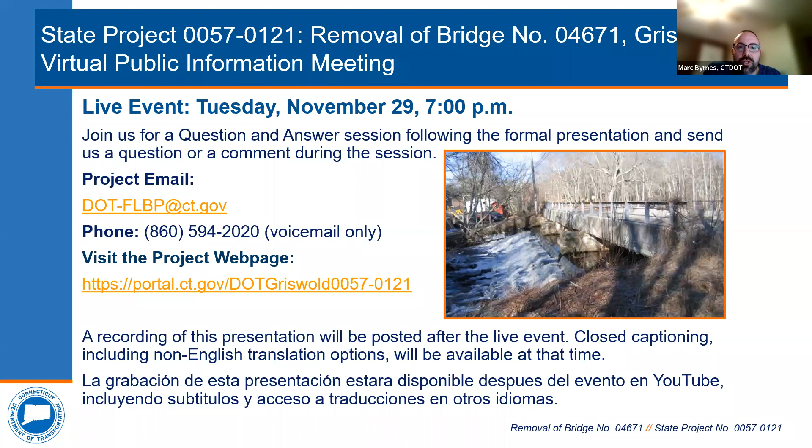The goals for tonight's meeting will be interacting with the project team, explaining the federal local bridge program, design managed by state or DMS program, welcoming remarks by the town of Griswold selectwoman, introductions of the project team, a formal presentation of the design process, which includes explaining the condition of the existing bridge and defining the purpose and need of the project, and recommendation of a viable proposal. Currently, we're only at 30% design plans.

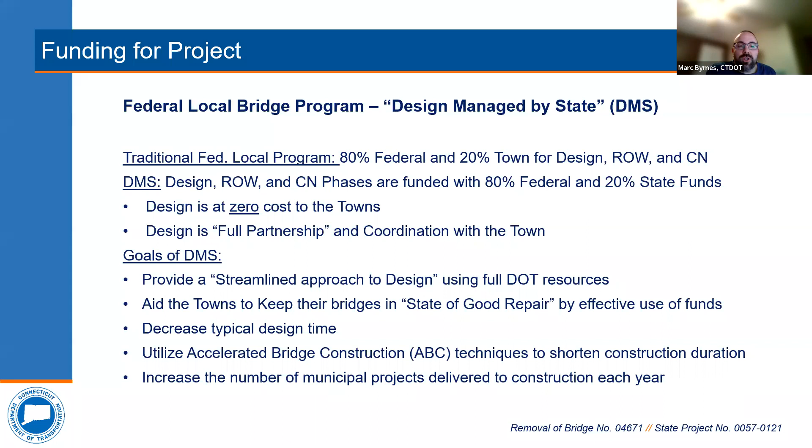Thank you. Good evening, everyone. I am Dana Bennett, the first selectman of Griswold. I'm here along with Todd Babbitt, Griswold's Director of Public Works. Welcome and thank you for joining us. We are pleased to partner with Connecticut DOT in this infrastructure funding for a bridge that was assessed for removal a couple of years ago. And we'd like to thank Connecticut DOT and all of the members that are here tonight to provide this public information meeting. Thank you very much.

Thank you, Dana. I will now introduce the project team. Our division chief is Bart Sweeney. Our principal engineer is Derek Lassard. As I stated, I'm the project manager, Marc Byrnes. Also with me is James Barrows, the DOT project engineer. From the Office of Rights of Way is Zachary Garano. And then from Close Jensen and Miller, who acts as an extension of the department as our liaison, is Mike Brady, the project manager, and Jeff Fontaine, the project engineer.

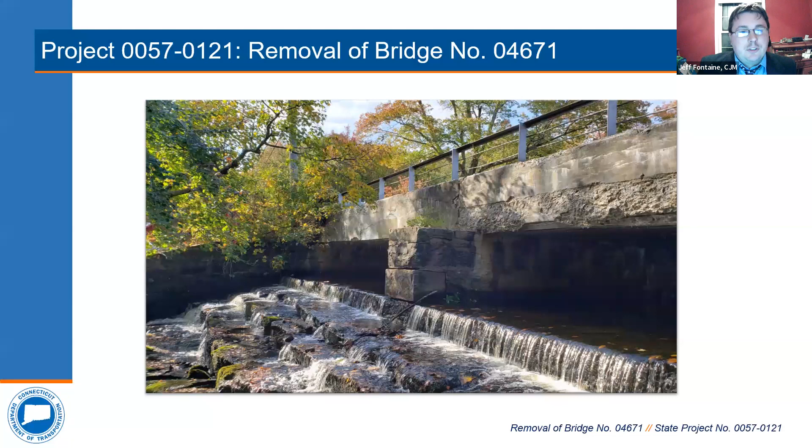With that, I will give it to Jeff. Jeff, you may proceed. All right, thank you, Marc. As Marc stated, I'm Jeff Fontaine. I work with Close Jensen and Miller, which kind of acts as an extension to the DOT as liaison for the state. And as he also mentioned, we're here to talk about the removal of Bridge 4671, which is Carroll Road over the Pachaug River in Griswold.

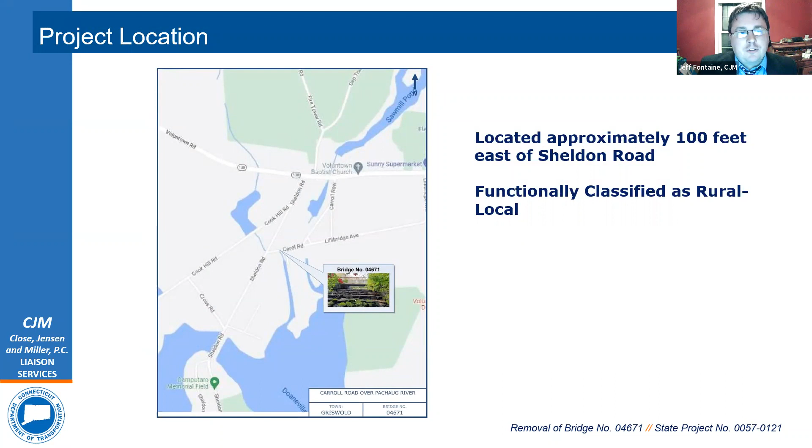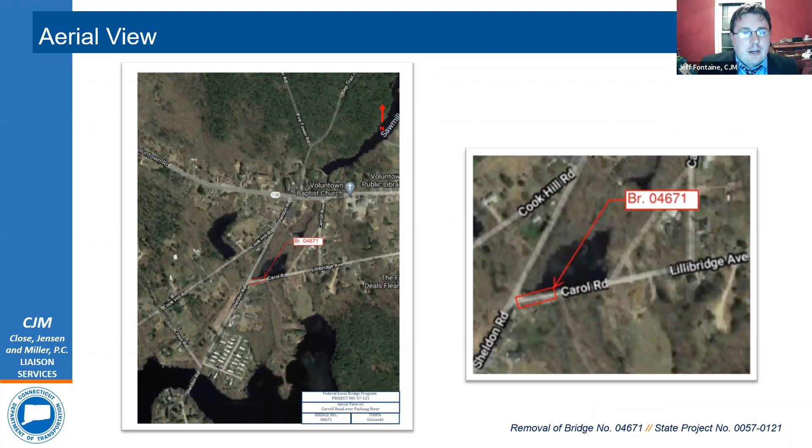And this is just another view from above, just to give another image of what it looks like.

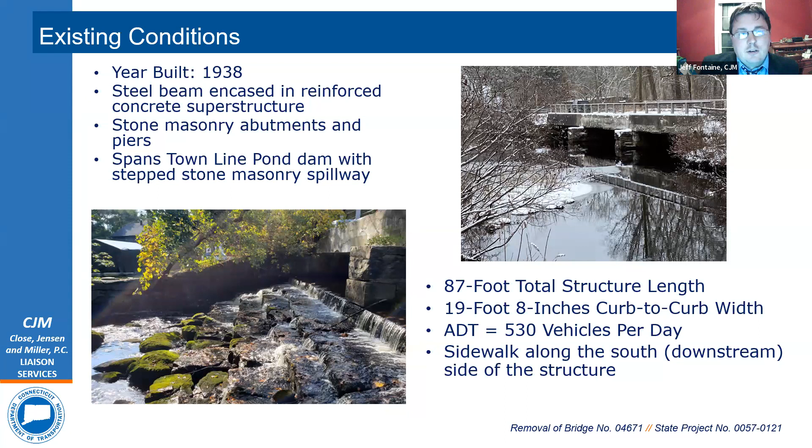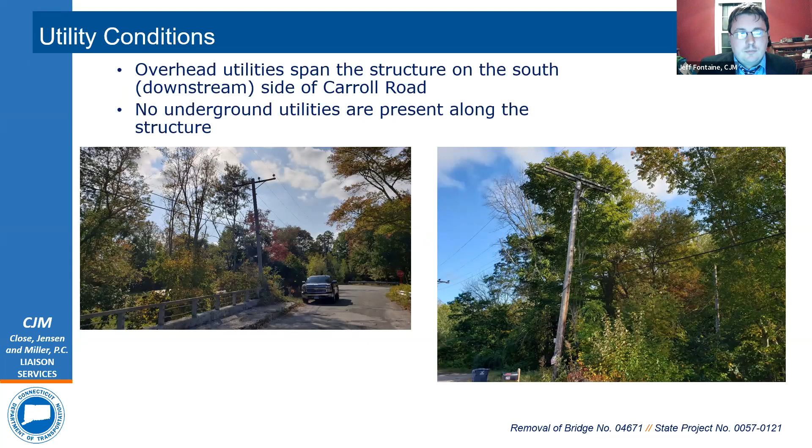So why are we out here for this project? Basically, the deck is rated as a 3, which is considered serious condition. As you can see in the photo below, there are several potholes and uneven pavement, which expose the concrete deck below it. And just off of the bridge, the bituminous roadway exhibits cracks, and some of the timber rails are rotted and missing cables.

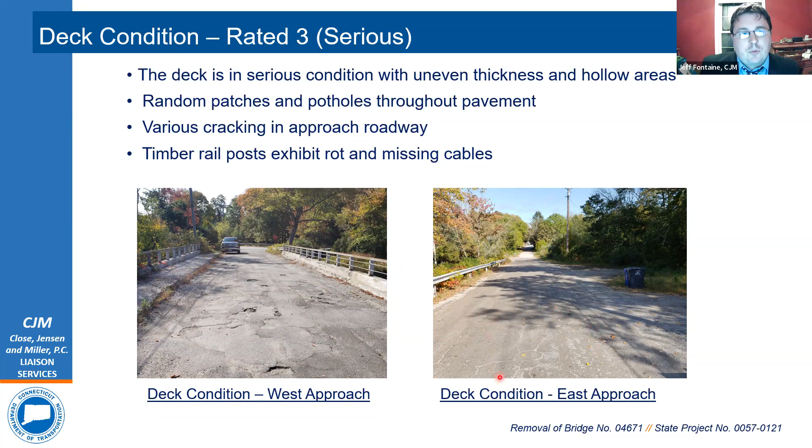The superstructure is also rated as a 3, which is serious condition. There are areas of spalls and hollow areas with exposed rebar, as you can see in the photo on the left. The steel beam bottom flanges have laminated rust, and there are longitudinal cracks with efflorescence up to the full length of the span, which you can see in the photo on the right side.

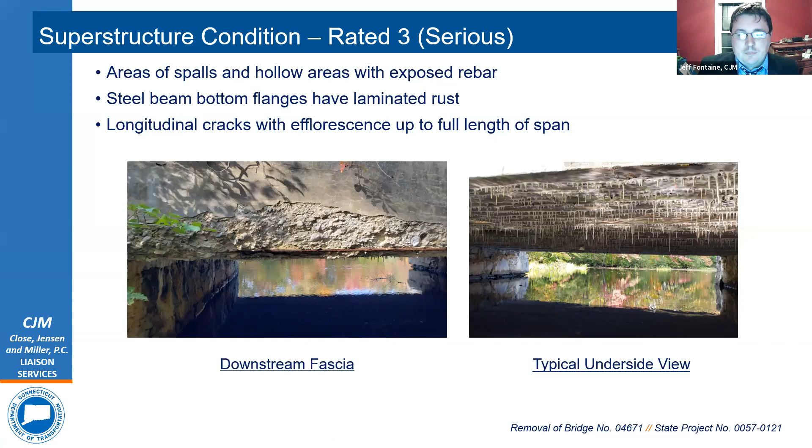The substructure, also rated as a 3 in serious condition, consists of deteriorated mortar, missing stones, and areas of efflorescence, as you can see in the photo. Each photo shows the abutments, and the wing walls also exhibit areas of missing stone, voids, and vegetation growing throughout.

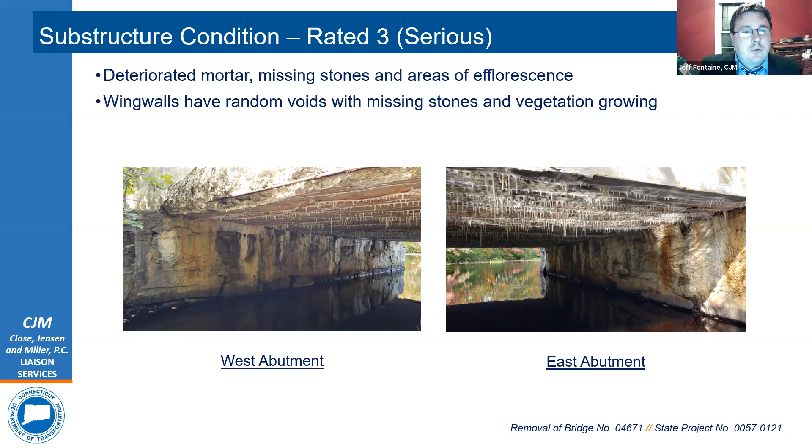So just to give a picture of what we're looking at, this is an aerial view of the bridge, which is colored in orange. A few items to note in this image are the two driveways on each side of the bridge, the privately-owned driveways, as well as Sheldon Road being within close proximity to the project. Also note that the entire bridge is within the state right of way, which is marked with a red line on each side.

So the proposed work that we plan on doing out here, as you can see, most of the orange is gone. We will be removing the deck and superstructure from the bridge and leaving the abutments and piers in place.

On each side of the bridge, on the west side, we'll be removing a portion of Carroll Road and extending the private driveway on the left side as needed to reach Sheldon Road with a smooth enough transition. On the right side, the east side, we will be extending the roadway to accommodate parallel parking on the south side.

And we will be reconstructing the pavement within that general area highlighted in yellow. Also to note, on each side of the bridge we have protective fencing and barriers, as a means of keeping everybody safe once the bridge is removed.

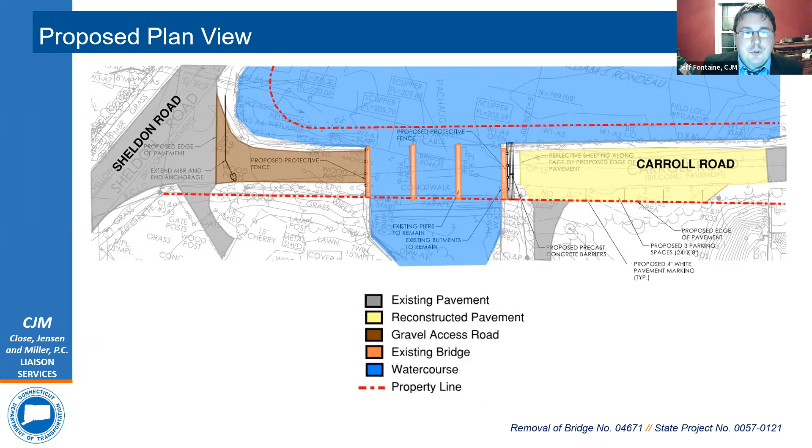So this is just a view of what the bridge would look like if you were to stand directly in the Pachaug River and look at the bridge. The areas in green are the existing abutments and piers, with the red being the dam. As you can see, a lot of the work is meant to not touch the existing dam. It is privately owned, and we want to make sure our project does not impact it in any way.

On top of each of the piers and abutments, we will be installing concrete caps just to ensure that everything is kept in a neat and orderly fashion.

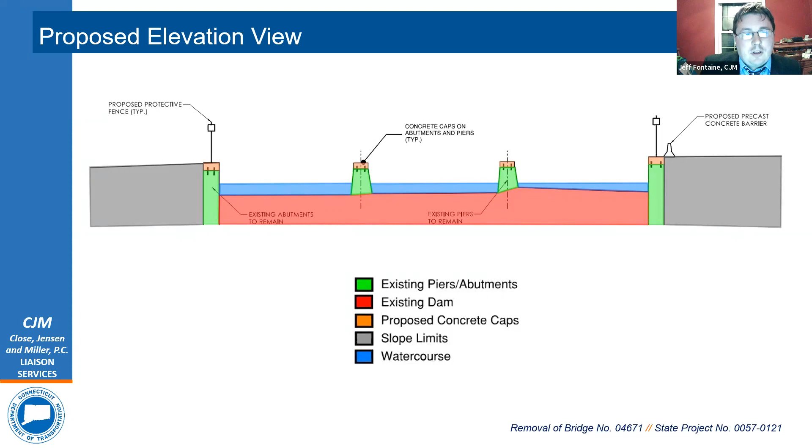So on the next slide, again to show how the abutments and piers meet with the dam: in this image, everything in blue will be removed as part of the project, and the top portion of what's shown in green will be reconstructed with the concrete caps as shown in the previous image. Basically, we just want to show that we're doing very little to impact the existing dam. During construction, we will have monitoring equipment in place to ensure that no damage or impacts are sustained.

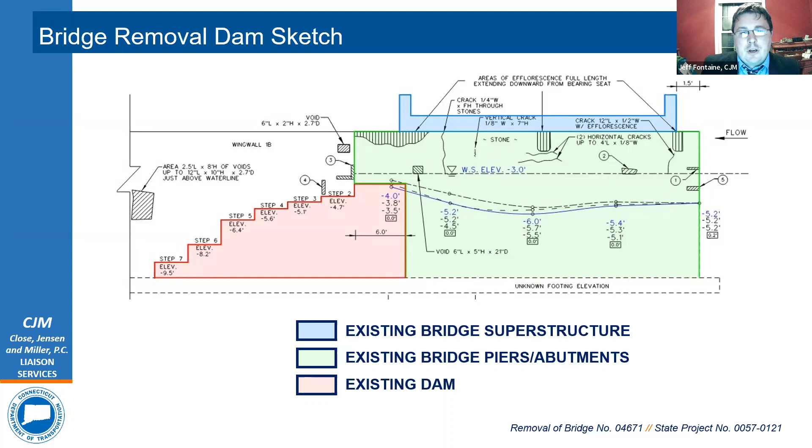So with the bridge being removed and during construction activities, we will basically be having a permanent detour in place. The detour is about 0.6 miles from one side of the bridge to the other and includes Sheldon Road, Route 138, and Carroll Road.

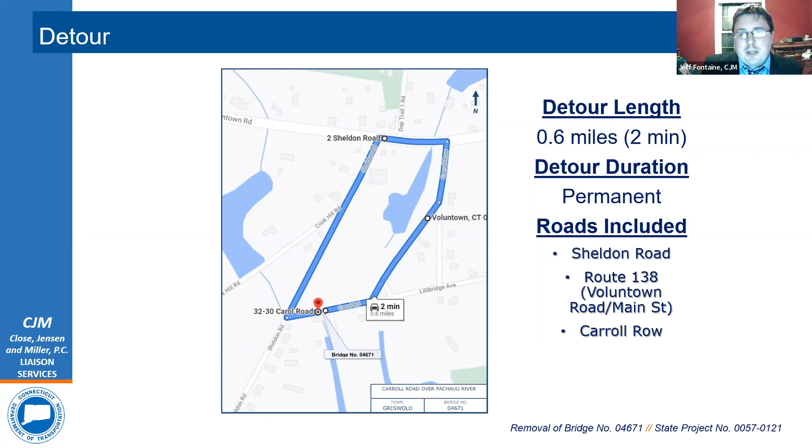So the anticipated schedule will be about 4 months from start to completed construction. We expect this to be completed during the 2024 construction season. As far as cost for the project, it is undertaken with 80% federal and 20% state funds, and we expect it to be a little over $500,000.

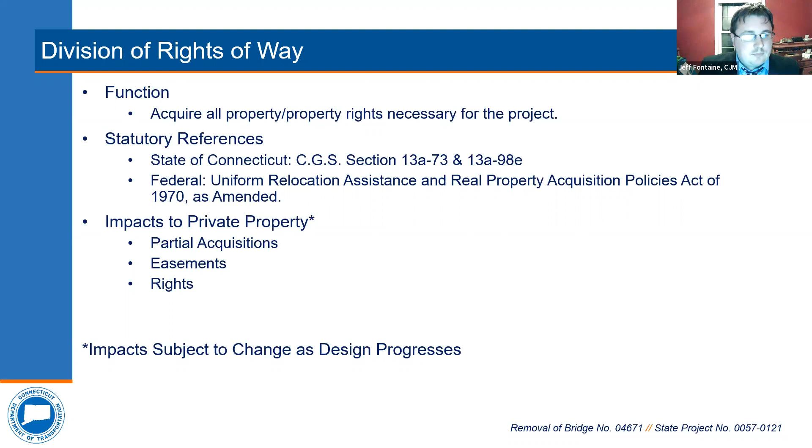So at this point, I'd like to hand it over to Zach from the DOT Rights of Way Division to talk about property impacts. Thanks, Jeff. Hello, my name is Zachary Guarino, and I'm a project coordinator with the Department's Division of Rights of Way.

Our office is responsible for acquiring the property rights needed for transportation projects. The proposed project design requires acquisition of property rights, so I'd like to give a brief overview of the Department's right-of-way acquisition process. Please keep in mind that the specific impacts are still being finalized and may change as the design progresses. Any required property rights will be acquired in accordance with Connecticut General Statutes sections 13A 73 and 13A 98E. When there's federal money used in any aspect of the project, the department must adhere to the Uniform Act.

Once the design has progressed to a point where we are ready to begin the acquisition process, each affected property owner will receive a formal letter of intent to acquire from the office along with the property map which depicts the exact property rights to be acquired. At that point, our office will determine the fair market value of those property rights and use that value to establish an offer of just compensation.

That offer will be sent out to the property owner in writing, and a right-of-way agent will be available to meet with the property owner and explain the project, go over the impacts to their property, and explain the state's offer. The property owner will have a reasonable time, typically 30 days, to consider the state's offer and enter into negotiations. When an agreement is reached, the department will prepare all necessary paperwork to record the deed and property map on the town land records.

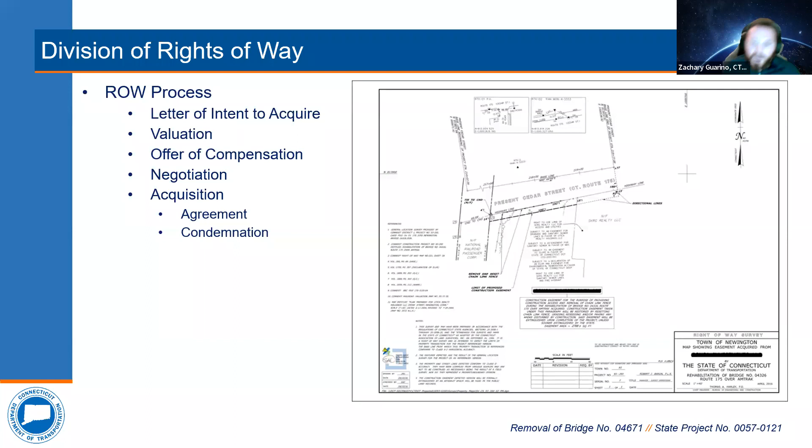If there are any questions regarding the Division of Rights of Way, I'd be happy to address them after the presentation. Thanks, Jeff. Thank you, Zach, and thank you, Jeff. With that, that concludes the formal presentation. We will now open it up to questions and answers.

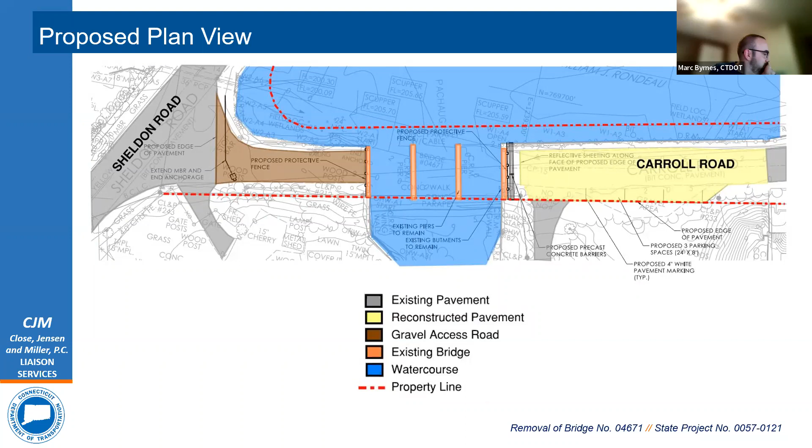Sure. So, yes, we basically will be removing the portion of Carroll Road up to pretty much where you see in the image, the brown and gray line there. So that portion of Carroll Road will be removed, and anything shown in gray would basically be maintained in the proposed condition. And the yellow portion will be repaved or remaining in place? Yep. Okay, great. Thank you, Jeff.